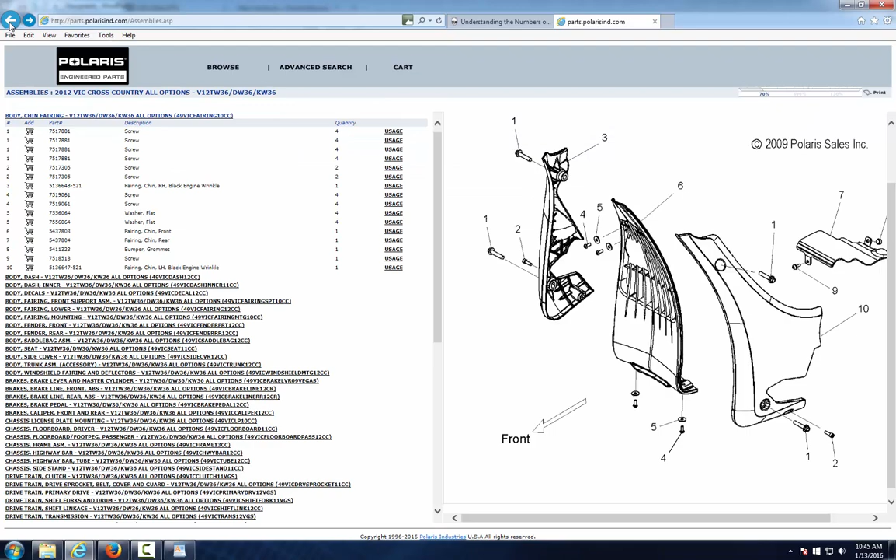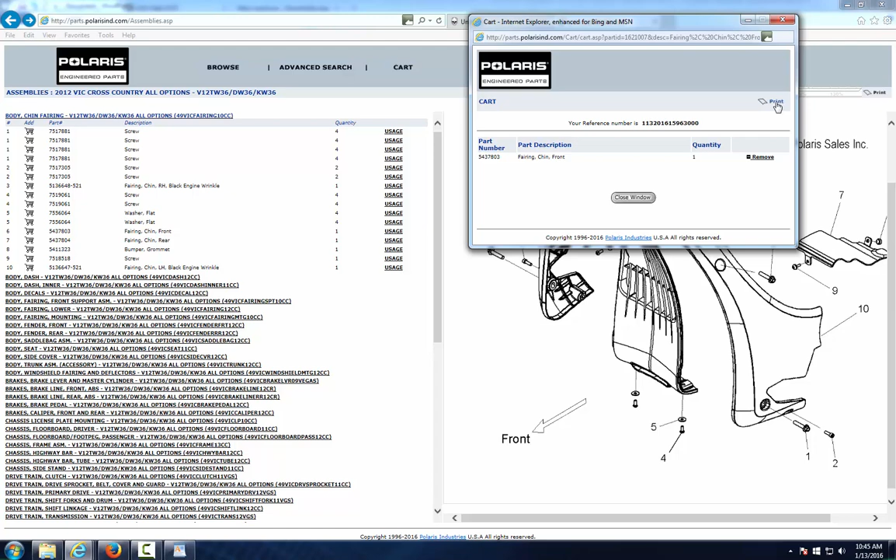Now this little shopping cart, I'll show you, it really doesn't work. A lot of the other websites, this will pop up and tell you what the cost is. They don't give you any of that in here. But what it does let you do is print this out, and you can take this to the dealer or keep it for reference later on so you know the part number that you want. Okay, so this is a really good thing to hang on to.

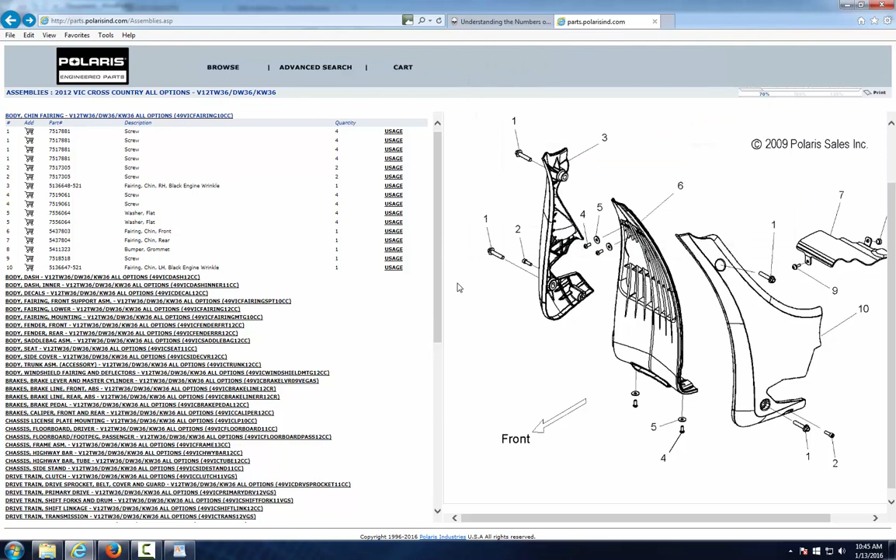Now let me move this line back over here. The way this works is this references this, but when you look at a parts fiche, you also have to understand how stuff goes together. So this bolt goes through this washer up into this part. These bolts go here, this bolt goes down here. So it also shows you how stuff is assembled.

So let's say you take this fairing off your bike, you come back a week later, you've got a box full of bolts and washers and a bunch of pieces, and you say, which bolt went to what? It can drive you crazy. If you come here, you can get a general idea. Now it does not give you the size, so like number 1, it doesn't give you the size of that screw. They don't offer that. Most of the time the dealer can't even tell you what size that is.

But what you can tell from the picture is this is a pretty big bolt with a longer section here. This is a pretty small bolt with a small section. This bolt looks like this bolt. It'll also tell you that you need 4 of them over here. So when you put all your bolts out on the floor, you can say, well, I've got 4 of these bolts, they look pretty big, they're long here, that's probably that bolt. So that's how you put stuff back together.

It also works the same way if you want to know how stuff comes apart. So if you want to look at this piece right here and say, how in the world does that come out? I see these 2 bolts here, I took them out and the spoiler still won't come off. What in the hell's going on? Well, you come to this parts fiche and you see there's 2 bolts underneath that's holding that on.

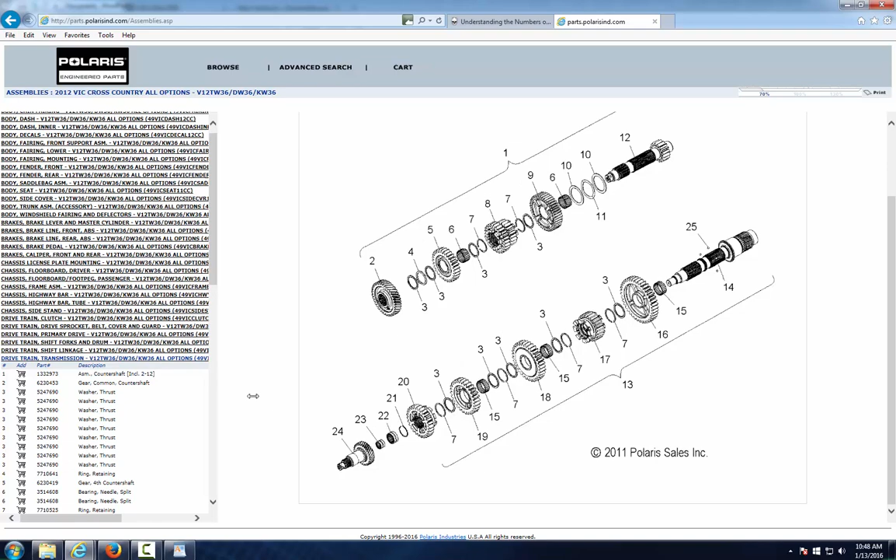Let's say drivetrain, so let's get into the transmission, right here, the transmission. So we click on that. Now that gives us the inside part of the transmission. We're going to drag our line over so we can kind of see what we're doing here. Now this is the shafts, and it should probably tell you it right here - counter shaft, common counter shaft, gear, okay.

What this is, is also a really nice breakdown of how stuff goes together. This is when you get into trouble, when you start taking stuff apart and you have it all laid out on the bench. If you miss something, you drop something on the floor, you can come back and say, well, this gear goes on first or last, whichever way you're looking at this here. But you would have a gear and then a couple clips of washer, seals, whatever this stuff is, then this one, then this. That's how this whole thing is assembled together.

And you have to assemble it in each step. For instance here, number 3, look over here, that's a thrust washer. Thrust washers are normally kind of small, you have 2 of them. Now you look and you say, well, this part number is the same as this part number, and I have 2 of them. Does that mean I have 4 of them?

Well, that means you have 2 here, and it's probably listed somewhere else too. I'm not positive without looking through all this, but Victory will do that a lot of times - you'll see the same part number over and over and over again. I don't know why they do that, that's beyond me, I'm not sure why. But the schematic's pretty much always right. So you could say, well, I don't know if the thrust washers go here or did they go here - this picture will help you. It's shaft, thrust washers, gear, clip, gear, all that stuff is how that goes on.

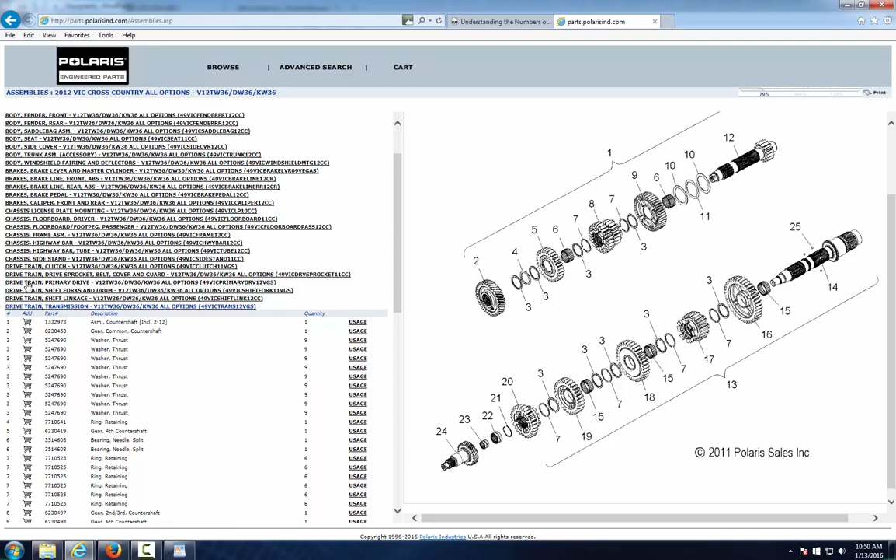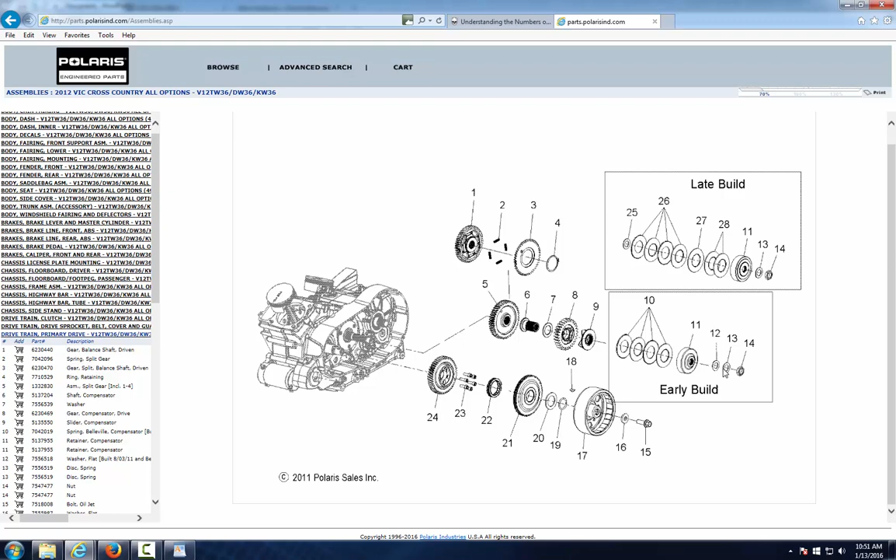So you'd look at drivetrain, primary drive. I don't know, let's click that. Okay, here's some stuff, pictures, but it's not really showing you the seal you need. So that's probably not it. These lines are showing you that this all goes in here, goes this way, and then into the motor. This one goes in here and into the motor too. So we're really not on that seal.

So you say, well, it's on the clutch side, maybe I can get closer. So you check the clutch side. We're basically looking at the same picture we just saw, but now all these pieces here make up this piece. This is kind of hard to explain if you're not a mechanic and don't understand this stuff, but this piece right here includes all these pieces.

So if you look at this gear thing right here, that's what you're looking at here. This stuff, plate number 13, is actually this plate right here. So all the clutch discs and floater plates are inside here. Once you assemble this, you slide it onto the motor, and these are the nuts and bolts that hold it together. So that's still not showing us the seal we need down in the shifter spot.

Okay, so it's just kind of trial and error until you learn this a little bit. We're going to go back down to the engine, go through, and say side covers right here—let's take a look at that. Side covers. Now we're getting somewhere.

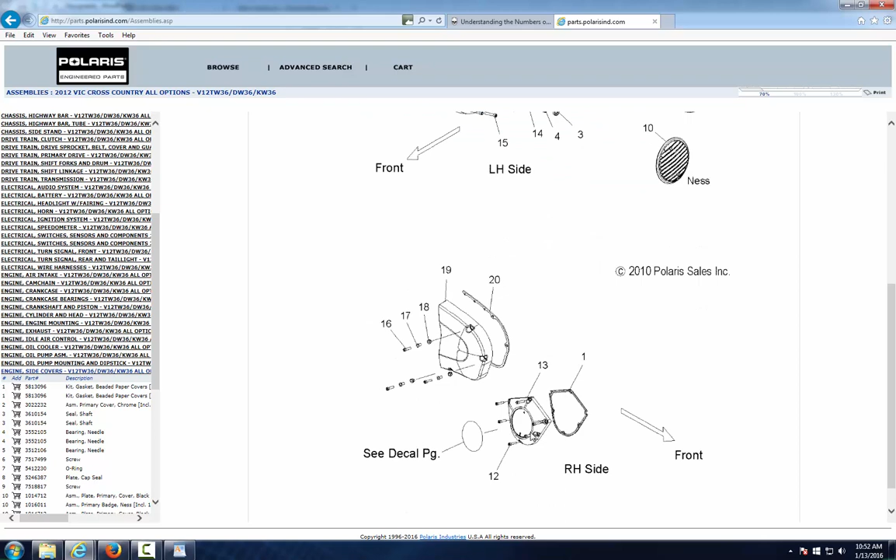Now we have the side cover. We look down here—this is your cam gear cover, this is your belt cover, this is your primary cover. So you start looking, where's your shifter seal? All these, number 15, 14, these are all bolts. We're not working up here.

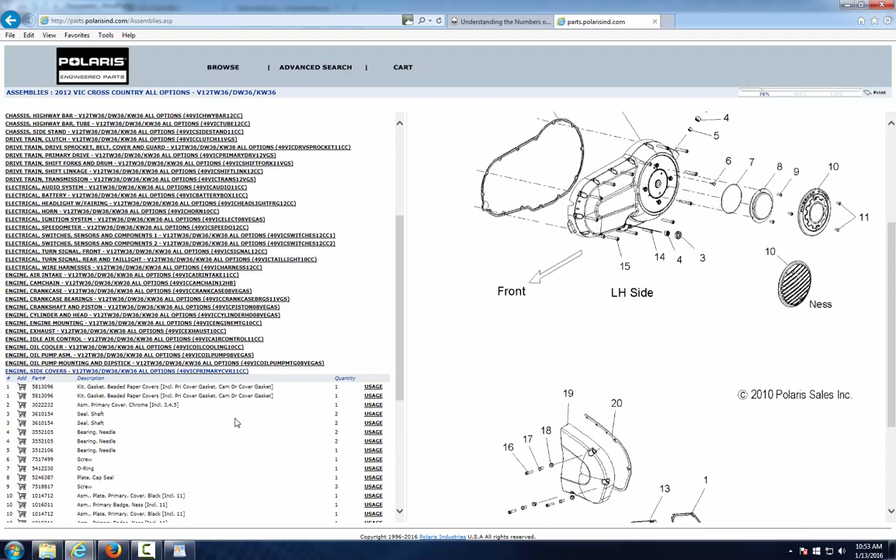So right in here must be where that seal is. So we look at 4 and 3—that's where we're at. You drag your side over, you go to number 4, needle bearing. That's not it.

But number 3 says it's a seal. So 99% of the time, if that's what you're looking at, here's your seal. You'll know there's a little bearing behind there, but that's the seal you're probably looking for. Number 3 says shaft seal, so you're looking for your shifter shaft. So that is your seal.

Part number 3610154—that's the part number. You can click that and it'll bring the box up. You still have your chin fairing piece in there, but there's your seal. If you want to get rid of the chin fairing, you click remove, and there you go.

There's your shaft seal, so you can hang on to that, call your dealer up. You can search this number on Google and see who might have it. Like I say, we stock this kind of stuff, but you can check if anybody else has it. Again, you can print this off to save it. But that's how you use a parts fiche.

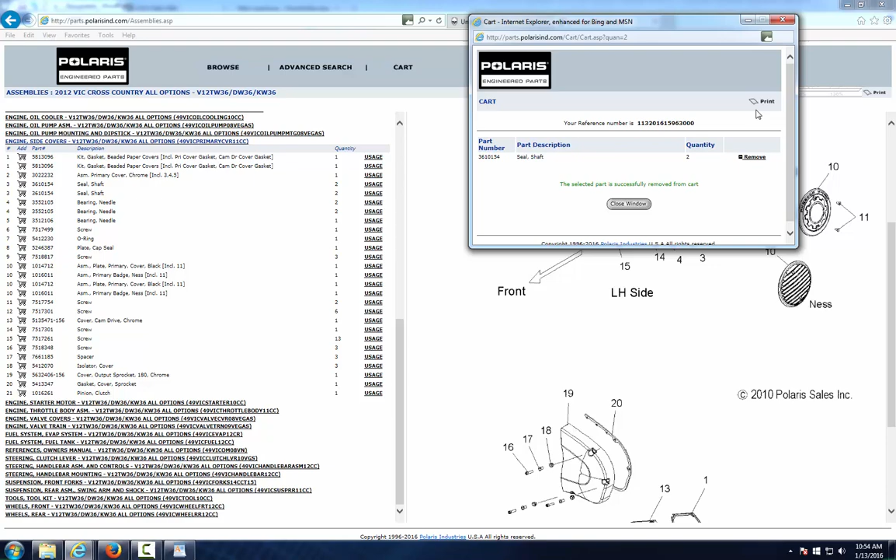So this is a tremendous tool for you guys, different than hammers and screwdrivers and wrenches, but this will really help you understand how stuff gets assembled. Again, you can see how all the nuts and bolts go in—here's your gasket, here's your belt side cover.

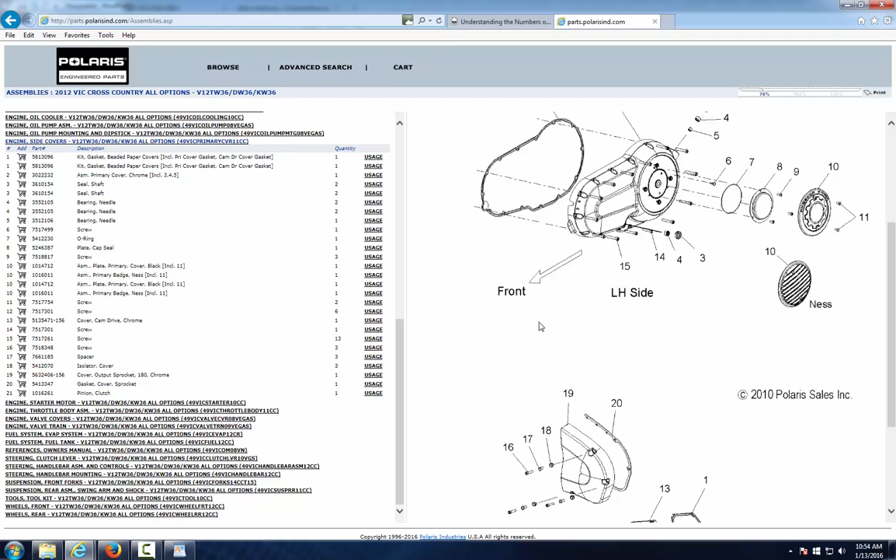One last thing I'm going to show you is something for the body. So if we go to body, let's say fender, okay? Now, the one thing you're going to see here, these are your paint codes.

So a lot of times when you guys are looking for paint codes, here they are. You can look them up. You have to do it a little bit of a different way. You have to look up a body panel, but then it'll give you the paint codes.

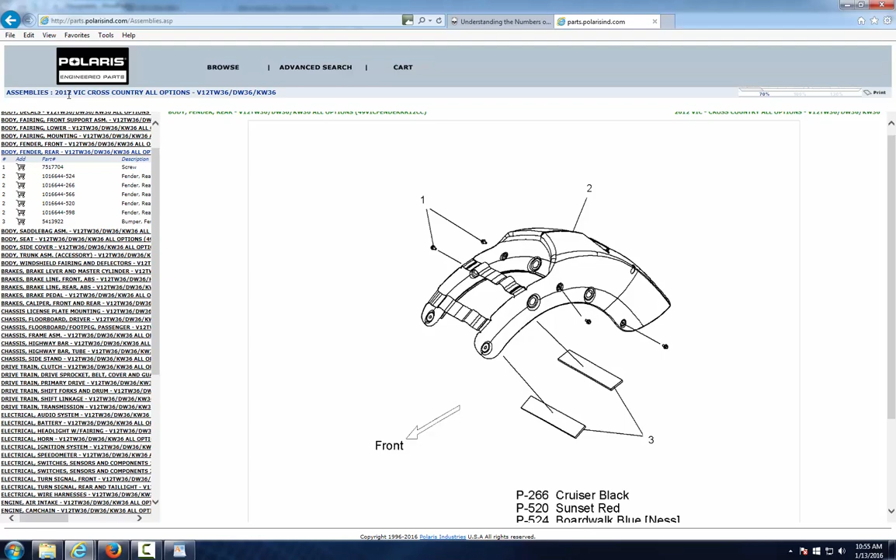So in 2012, because that's what we're on, if you look up here, 2012 cross country, these were your paints: 266 black, 520 sunset red, 524 boardwalk blue, and so on. So if you need to call Victory, or again, we offer all these paints on our website, witchdoctors.com, but P266 is the paint code for cruiser black, P520 for sunset red, P598 imperial blue.

So this is a way that you can find how to get your paint codes when a lot of times the dealers, and you ask people, they have no idea. Not putting the dealers down, but a lot of them have no idea. There you go. You can do it yourself, and it's really easy.

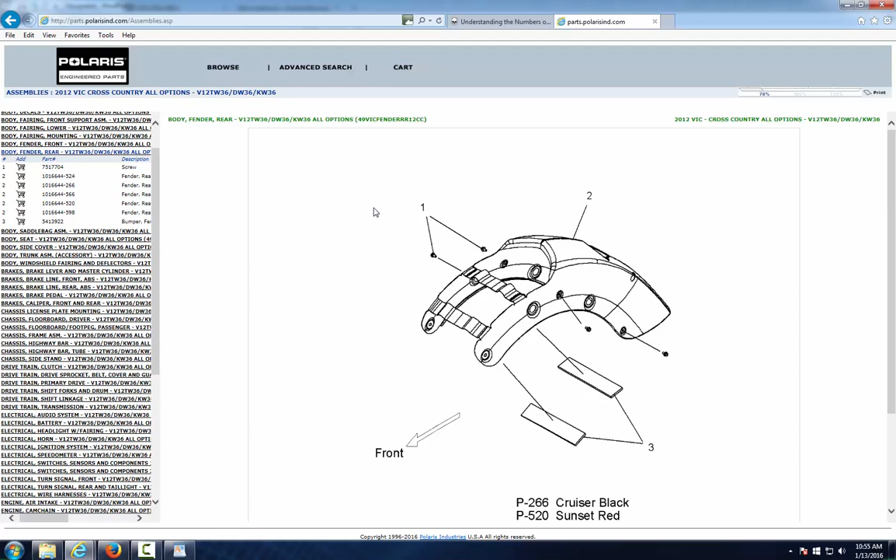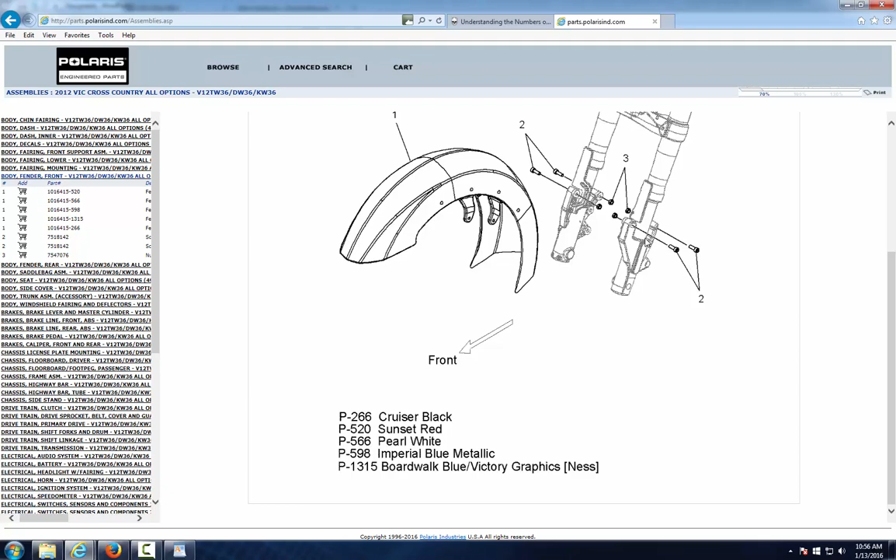Another real popular one, since I see the fork here, is that you'd go, if you want to know how your forks, or let's look at your handlebars. Handlebar mounting. A lot of people ask, how do the handlebars come apart on a cross country? Now, this picture is obviously much easier than how they come apart, but it shows you the bar, it shows you the cap that holds it on.

The one thing you'll notice, and in our install videos we show it, you have one bolt that goes down into the cap and the other bolt comes up from the bottom. So you got to make sure you remember that. You don't want to put them both in from the top. One goes down from the top and one goes up from the bottom. Okay, so just something else to keep in mind.

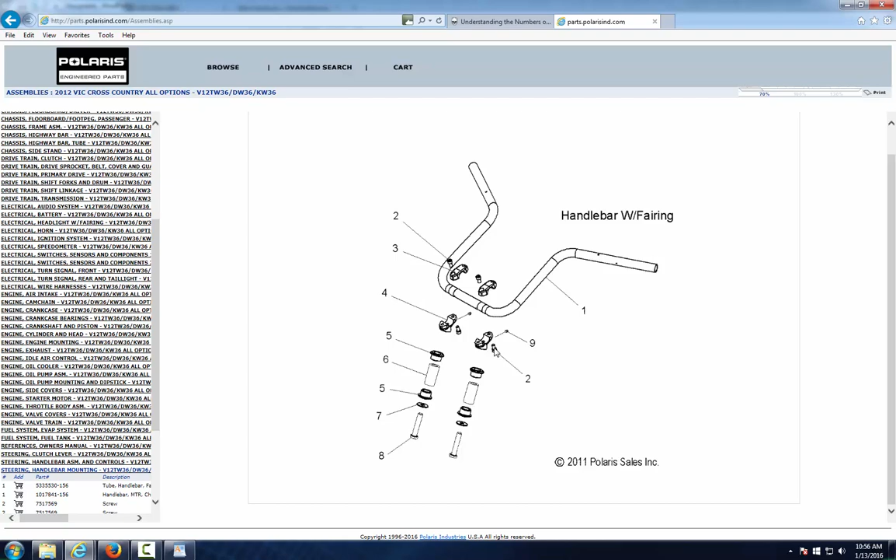But I'll show you the front forks. For you guys that want to rebuild your own forks and do your own forks, here's a good schematic of how everything goes together. We've got plenty of videos on how to do this. When you take stuff apart, you're going to set this stuff out. We show you to set it all out in order. If you don't, you can always come back to here and look at it.

Lower tube, your seals, your clips, your bushings. And this bracket here means all this stuff is sold as a kit. Okay, when it includes everything, that means 14 includes all this. So it probably says over here kit somewhere. So you go to 14, right there, kit, seals and bushings. Okay, there's the part number.

Again, we carry all this stuff on our website. But if you want to look, and a lot of guys say, well, does this kit fit my hammer? You know, my hammer forks look like this. Well, you look at kit. For the seals and bushings, you click usage. Here's what it fits. Those seals fit cross country, magnum, hammer, kingpin, hammer, all down to 2010. So it does fit all those parts. So that's how you can tell what all that kit fits.

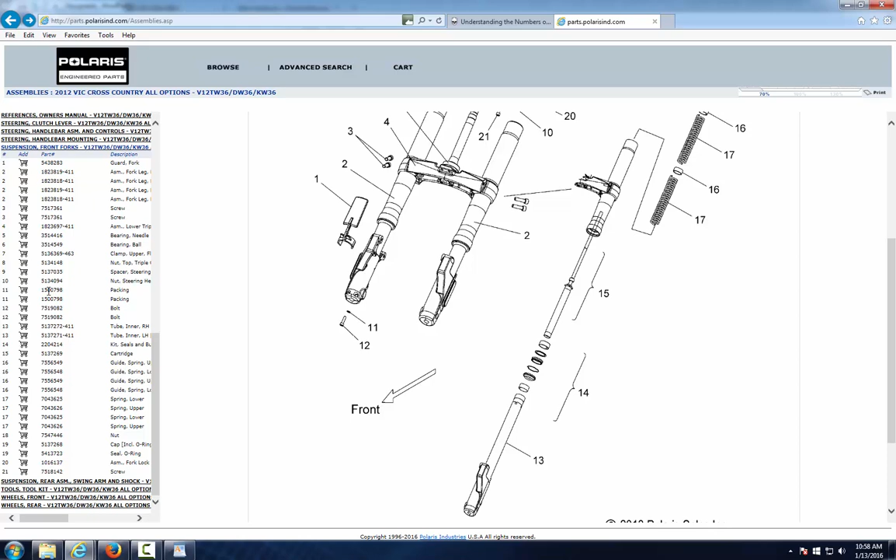So always double check with your dealer these part numbers. A lot of times they do something that's called supersede. That part number, Victory then changes to a different part number. So you may be looking for this and this part number is no good anymore. It might be the exact same part, they just changed the part number and it's called supersedes to another part number. So always verify with a dealer that the part number you have over here is really the correct part number.

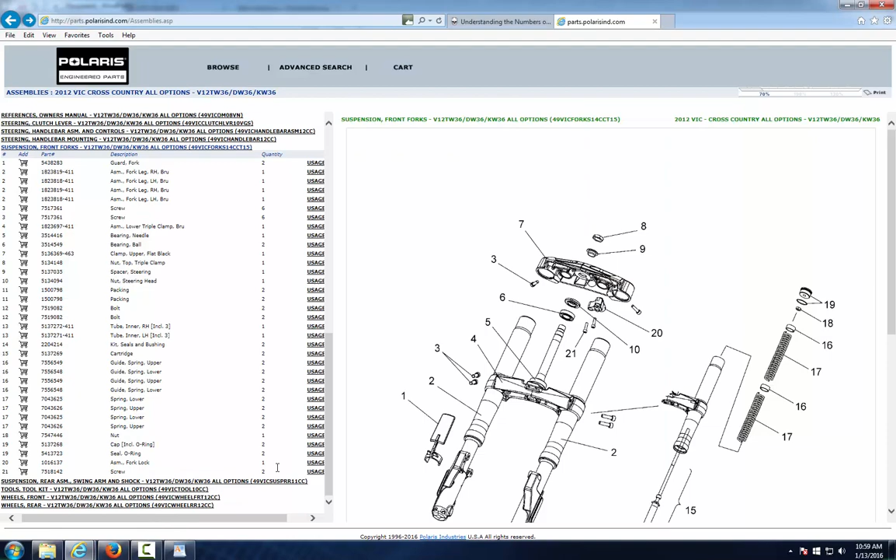But again, you know, expand this out and it shows you everything, how many you need, everything. So hopefully this helps you. Again, I'll put this, here's the website that you want to put in, so you can cut and paste that into your browser so you can find this. But this is a tremendous help, a tremendous tool for you guys that are working on your bike, or guys that just want to look up some parts and see what's going on. So I hope this helps you out. Thanks for watching.